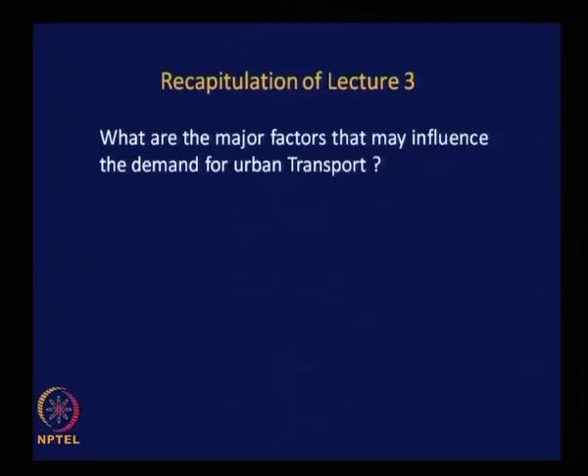Answer please. The population, household, age and the cultural aspects. Good. Any other factor? Yes, pass on the microphone there. The demographic and social factors. Yes. Any other response?

Economic factors. So to put all these things together, we can say that the factors can be categorized as demographic, social and economic factors, mainly involving population, household, age, cultural aspects, employment level, income and vehicle ownership, isn't it? So that is how we need to understand the various factors normally influencing the intensity of travel or demand for transportation in urban areas.

The next question is this: what is the likely proportion of urban population in the year 2030 as per United Nations population statistics in the whole of the world and in India, based on your own perception? Any response?

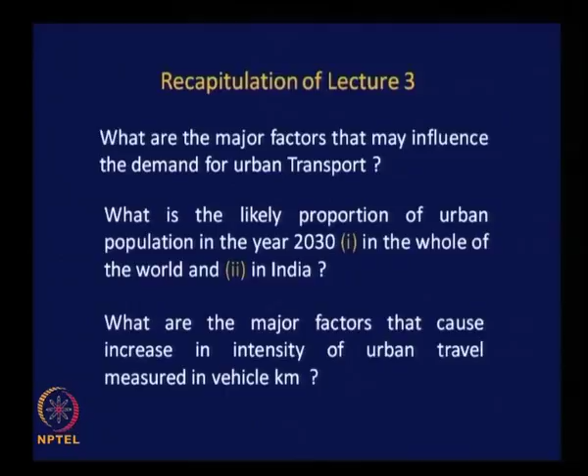You may recall that we discussed about the gradual increase in per capita trip rate in developed countries over a period of time, then increase in household vehicle ownership over a period of time, resulting in increased driving license holders. Then parallelly there was decrease in the household size due to economic independence of the people, and also there was decrease in car occupancy to satisfy the desire of independence, privacy, etc.

of the urban dwellers. Then on the land use side, there was migration of population, people living in city centers to the peripheral areas, mainly because of the suffocating congestion experienced in the city centers. And this migration led to migration of employment centers also to the peripheral areas, resulting in widespread urban transportation activity, leading to increased travel in terms of trip length or passenger kilometer.

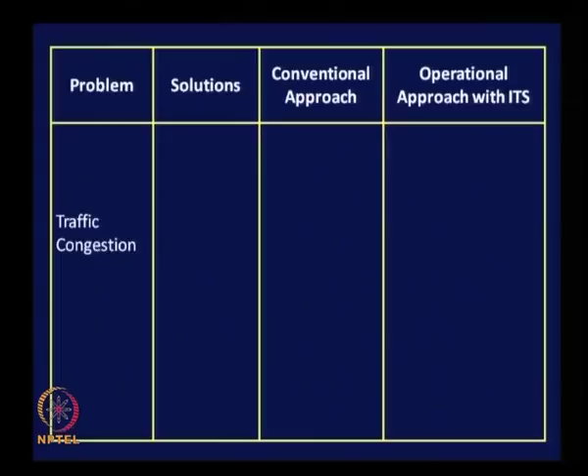And a possible solution in principle for this problem, as you may guess, is to increase roadway throughput or roadway capacity. A conventional approach to increase roadway capacity could be by construction of new roads or constructing additional traffic lanes.

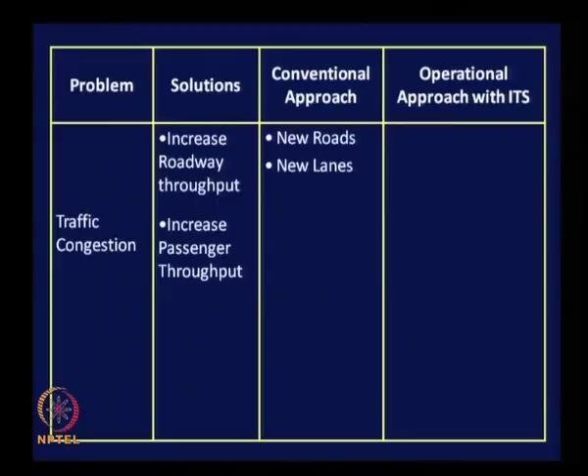Another possible solution to mitigate traffic congestion is to increase passenger throughput. The previous solution is to increase vehicular throughput by widening roads. Instead, you can think of increasing passenger throughput by some means.

It would be possible by means of the following measures: by providing HOV lanes, high occupancy vehicle lanes, exclusive lanes for high occupancy vehicles, so that these vehicles move faster, or encouraging carpooling. Once you provide HOV lanes, obviously you will find that carpooling picks up, mainly because more and more people want to occupy a single vehicle and take advantage of HOV lane, which facilitates faster movement.

Or you can also think of providing fixed route transit service, good transit service, metro rail system, good tram system, faster bus service, and so on.

Another possibility of reducing congestion is by reducing demand itself over space as well as time. You may wonder whether it is possible or desirable to reduce demand. It is not desirable, because we must encourage mobility in general, as mobility is key for growth of socio-economic activities. Our transportation planning process should not end up curbing mobility.

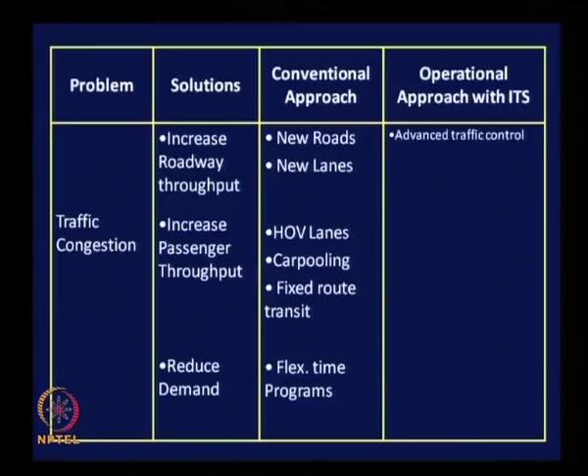You can also think of various ITS measures related to this conventional approach. I'll just quickly list these measures without going into details: advanced traffic control, incident management, corridor management, advanced vehicle systems, real time ride matching, integrating transit and feeder services, flexible route transit, and new personalized public transit.

Personalizing public transit is a very interesting concept - like a call-a-bus concept. People can record their demand for transport, and an operator can send a mini bus to pick up passengers based on the timing requirement as well as the destination requirement. That is what is meant by new personalized public transit.

Telecommuting, transport pricing - how do we reduce congestion by transport pricing? You can impose a toll in highly congested areas. Every vehicle has to pay a toll. This acts as a deterrent for vehicle users, resulting in reduced usage of highly congested areas. This is what we experience in practice.

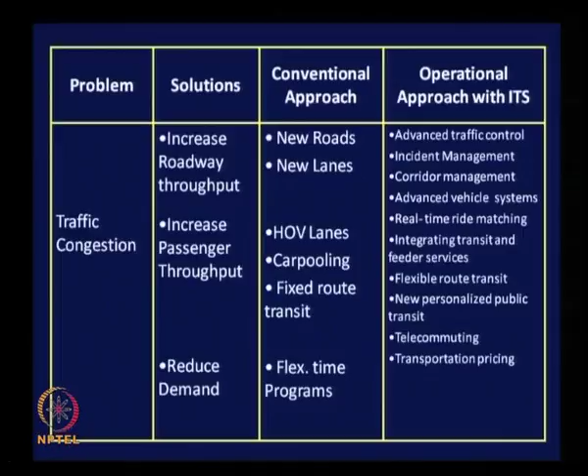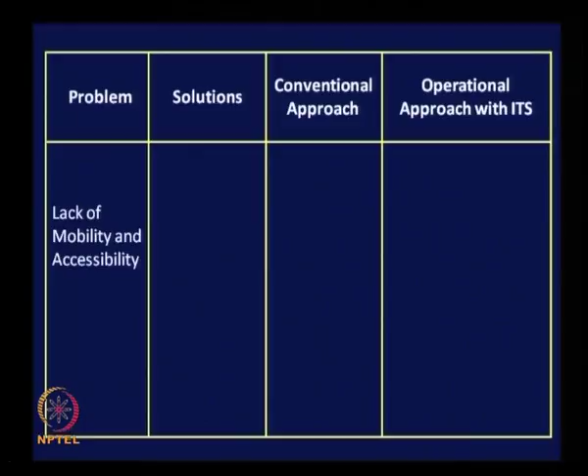Apart from traffic congestion, we have other problems common to any urban area. For example, lack of mobility and accessibility. We may have a system, but it might be difficult to access different modes of transportation, restraining the mobility of urban dwellers. The general approach to providing a solution is to provide user-friendly access to quality transportation service. This is a general methodological approach for providing a solution.

How do we do it? By conventional approach. The possible solution is to just expand fixed route transit and paratransit services - paratransit to provide access to the main transit service. That is how you can simultaneously increase both the availability of transit service and access to the available transit service.

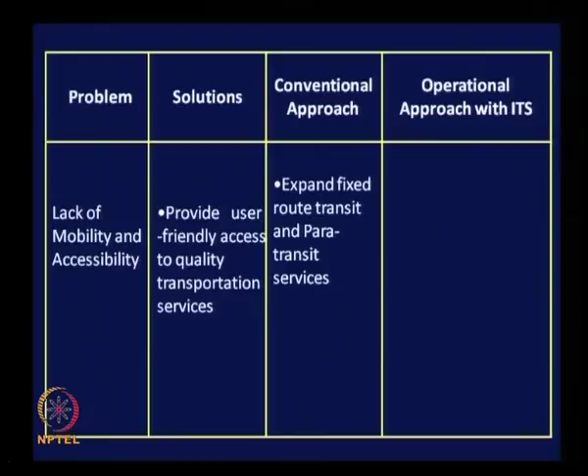Another related possibility of solving this problem is radio and TV traffic reports, which help commuters understand operational changes in the transit system and the level of congestion existing in different parts of the city. This will help them plan their trip or modify their trip timings so that they do not get caught in traffic problems.

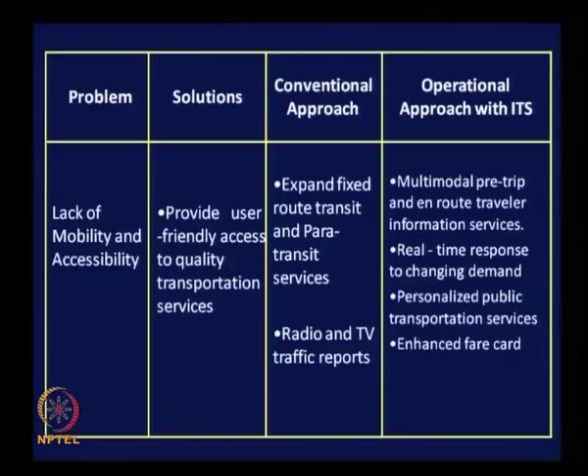The related ITS operational approaches are multimodal, pre-trip and en-route traveler information services, real time response to changing demand - as when you travel you get information about congestion levels in different parts of the road network - personalized public transportation services as mentioned before, and enhanced fare card, implying a single fare card can be used for multiple modes. This is quite common in developed countries, which makes travel seamless and convenient.

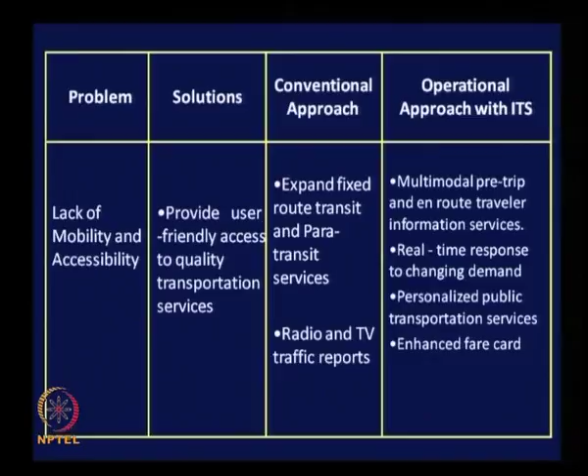Another common problem we face in urban travel is disconnected transportation modes. We have different modes of transport available in some cities, but they operate in isolation, maybe because of operational policies of different operators or for want of a coordinating system to integrate these modes and operate the whole set as one system.

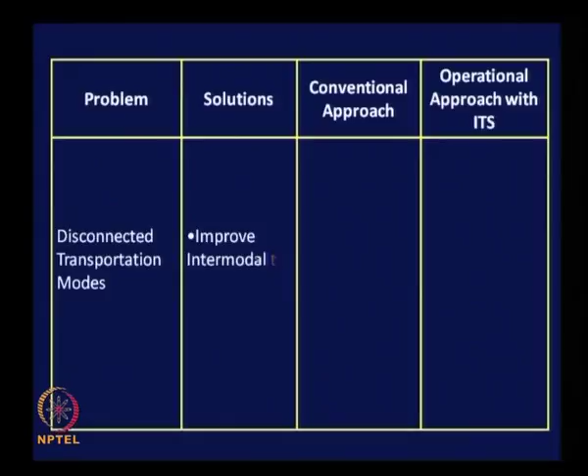The possible solution is to improve intermodality, or improve connectivity between existing modes. How do we do that in practice? By conventional approach, we have to physically construct intermodal connections - for example, providing good temporary parking facilities for buses at metro stations. Buses can bring passengers, drop them at metro stations, pick up passengers, and leave. Good parking facilities for two-wheelers, bicycles and so on connect the different modes of transport, making overall trip making easier for urban dwellers.

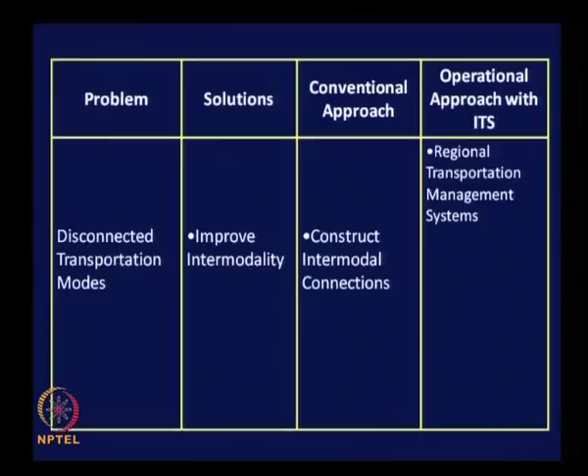Related ITS issues involve regional transportation management of the system as a whole. You can divide the urban area into different regions and ensure the whole region is well connected by the transportation system - taking a regional approach rather than looking at it at the micro level. That is what is meant by regional transportation management system.

Similarly, a regional transportation information clearing house answers any kind of question pertaining to a particular region for all users, providing a window for them to get this information immediately.

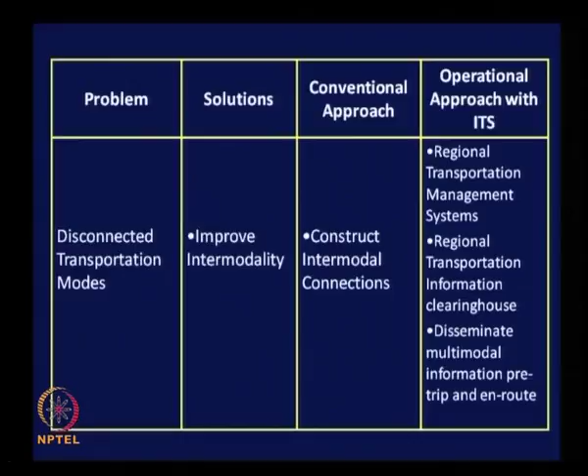Then disseminate multimodal information, pre-trip and en route, about connectivity between modes. Even while traveling, if they want information about the availability of a connecting mode, the traveler should be able to get it during travel. These are not imaginary steps - these are steps actually being taken in several cities of developed countries. These systems are in place and functioning.

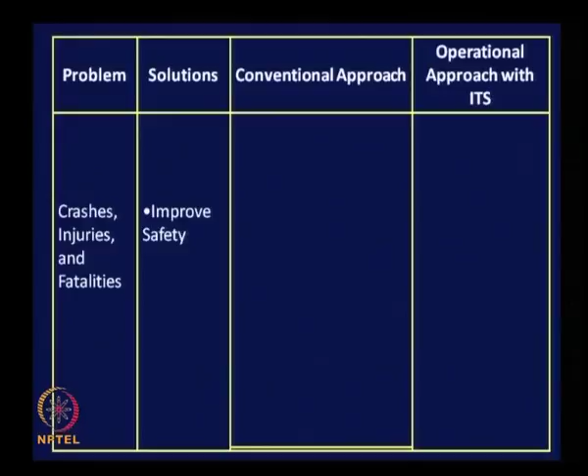And finally, the most severe and important problem faced in urban context is crashes, injuries and fatalities. What is the approach to provide a solution to this problem? Obviously, in one or two words: improve safety. How do we improve safety? The first major step could be to improve roadway geometry and sight distance.

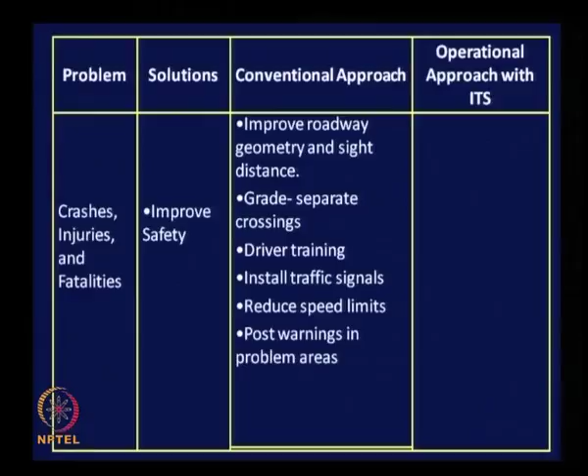Then grade separate crossings or construct flyovers at major intersections. Driver training. Install traffic signals wherever required. Reduce speed limits if required. Post warnings in problem areas, install warning signs or signals when required, and related ITS measures.

Partially and fully automated vehicle control systems - the vehicle should be automatically controlled in case of emergencies or crash-like situations. A vehicle condition monitoring system should be in place if you want a safe transportation system.

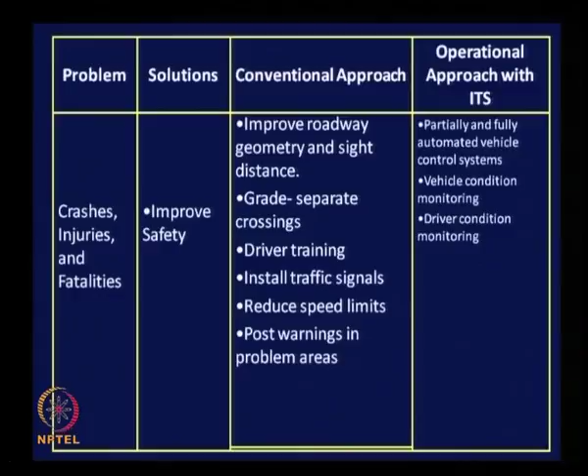Similarly, a driver condition monitoring system through proper driver licensing and continuous driver testing. Similarly, a good vehicle licensing system and continuous vehicle monitoring system. Advanced grade crossing systems, automated detection of adverse weather and road conditions, vehicle warning and road view notifications, and automated emergency notifications.

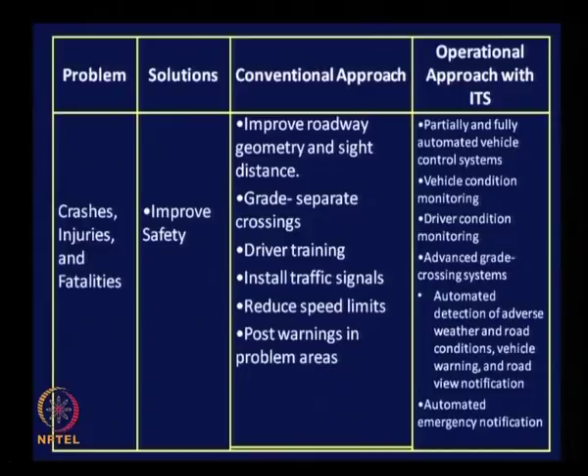We have discussed the common problems experienced in the use of transport systems in urban areas, starting from traffic congestion, disconnected modes, lack of mobility and accessibility, as well as traffic safety issues. As remedial measures, we discussed construction of new roads, addition of new traffic lanes, construction of intermodal facilities, improving roadway geometry, construction of flyovers, and so on.

My question now is, how do we go about constructing these infrastructural facilities which are highly capital intensive? How do you know that a new road you are going to construct will meet the demand for the next 1 year, 2 years, 5 years, or 10 years? Do you have the answer? Let us say you are planning to add one traffic lane on a particular road - are you sure it would be sufficient for the next 20 years? We do not know.

When you are constructing a flyover, what is the basis on which you will fix the geometry of width for different streams of traffic? When you consider a 4-legged intersection with two-way traffic movement on all 4 legs, you end up with 12 different traffic streams. And as a designer of this grade separation facility, you should clearly know the volume of each of these streams of traffic and the space requirement for them. Is it enough if you provide space for these streams as measured today, in the base year?

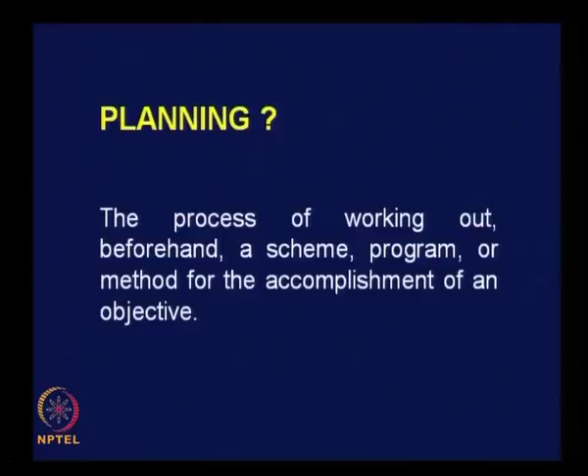With this understanding, let us try to define the process of urban transportation planning. Urban transportation planning is the process of understanding the factors influencing the demand for urban travel, then development of relationships between the factors and the travel demand, and third, use of the relationships to predict the future demand for travel and the resulting transport infrastructure needs.

That is the end point. Ultimately, we are interested to know what is the transport infrastructure requirement to meet the future demand. That is the end product of any transportation planning process. Clear?

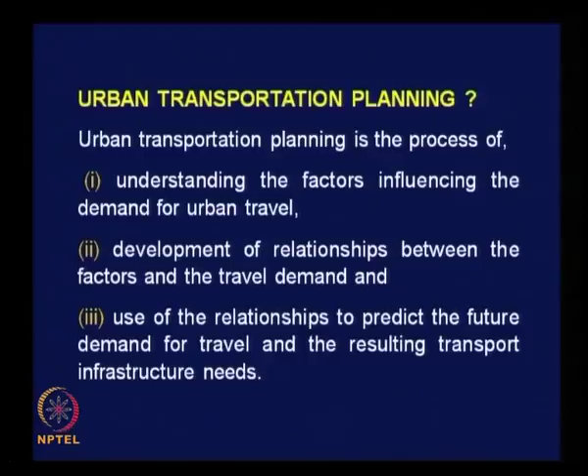Now we are ready to look at the contents of this course: Urban Transportation Planning contents. It starts with introduction, of which we have already completed for this course.

Then we will discuss the transport planning process in the context of urban transport system planning, mainly the various steps involved in the transportation planning process, and integration of goals, objectives and standards related to the urban community into the transportation planning process.

The third topic is trip generation analysis. As the term implies, it is about understanding the trip generation rate in urban areas. There are two aspects of trip generation: trip production and trip attraction. As you can guess, most of the trips are produced at home in an urban area, so we will be developing trip production relationships or models by relating the actual trip production with household characteristics.

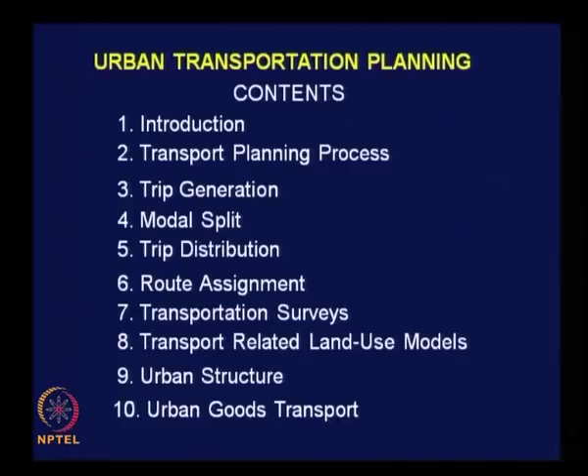Now let me give you some references for this course. I am listing the references in the alphabetical order of the author of the book. The first one by Adib Kanafani, 1983, Transportation Demand Analysis, publisher's name is given there, published from New York, and I will simultaneously give a feel of the book also to you. I will just show you the contents of the book so that you can understand the extent of utilization of each of these books to this particular course.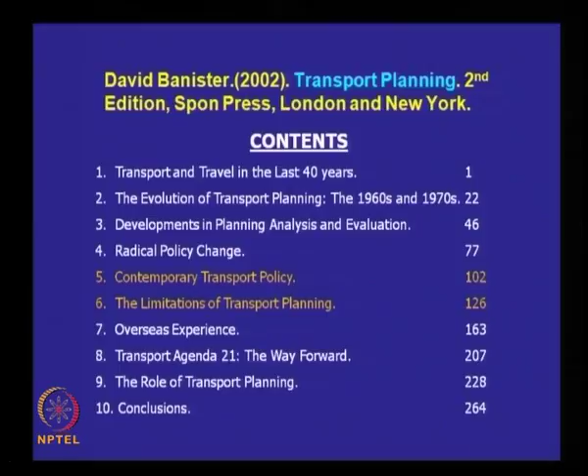Next, Hutchinson, B.G., 1974. It's a very old book. It was not revised subsequently, but it's a good book. Principles of Urban Transport System Planning.

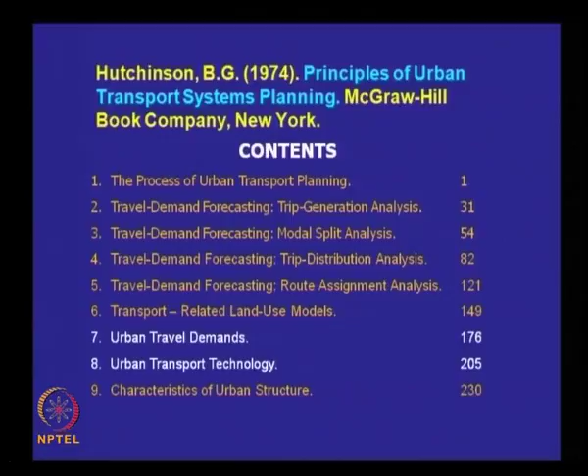And you can see the contents of this book, and I have given orange color to quite a good number of chapters of this book because I find it's quite relevant for this particular course, starting from the process of urban transport planning, trip generation, modal split, trip distribution analysis, route assignment analysis, transport related land use models, then urban travel demands, urban transport technology, characteristics of urban structure, and there are few more chapters in this book.

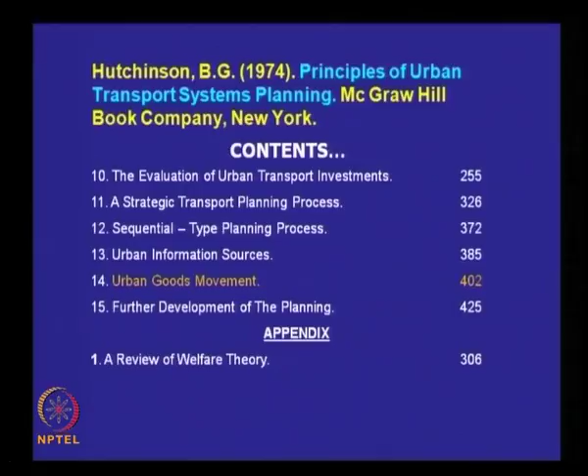The evaluation of urban transport investment may be relevant to transportation economics, a strategic transport planning process, sequential type planning process, urban information sources, urban goods movement is dealt with by this author, and further development of the planning process itself, and there is an appendix giving information about review of welfare theory, which is relevant for some of the modeling aspects related to transportation system planning.

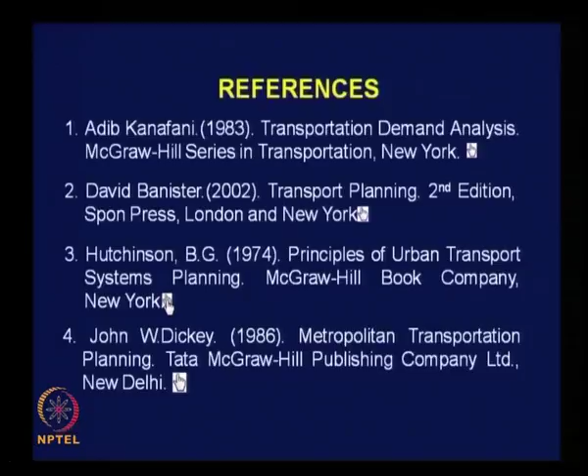Next, John W. Dickey, 1986. Title of the book is Metropolitan Transportation Planning, Tata McGraw-Hill Publishing Company, New Delhi.

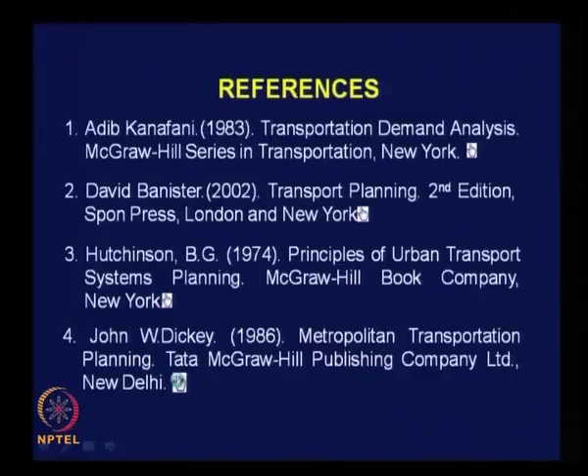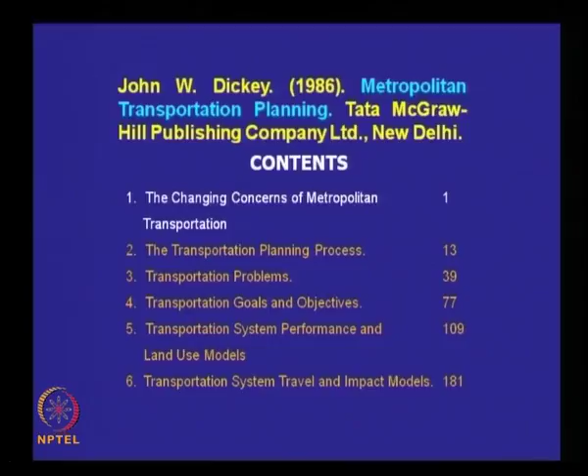Most of them are related to US transportation conditions, but still some of the basic aspects are relevant to our condition too.

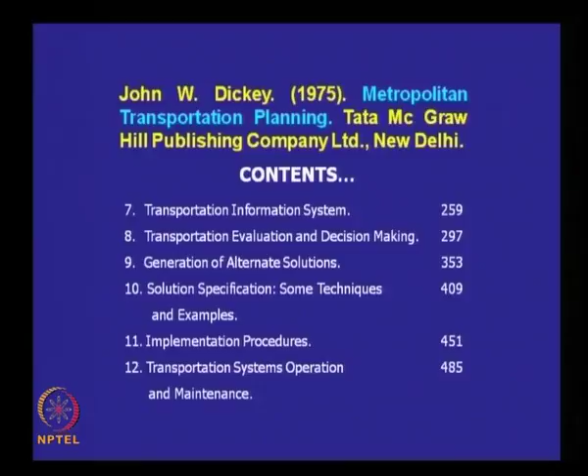A few more chapters in the same book: transportation information system, transportation evaluation and decision making, generation of alternate solutions, solution specification,

some techniques and examples, implementation procedures, transportation systems operation and maintenance. Then you can also refer to this book, Juan de Dios Ortúzar and Luis G. Willumsen, 1996, titled Modeling Transport.

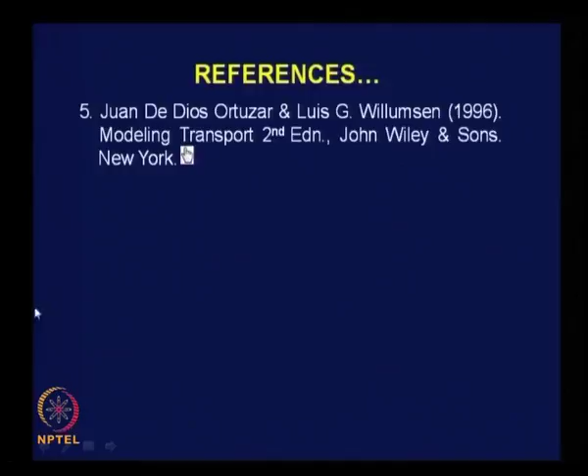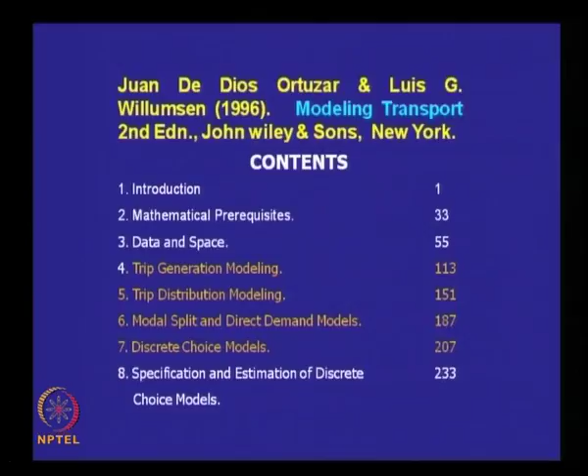Contents of this book: starting from introduction, mathematical prerequisites, data space, trip generation modeling, trip distribution modeling, modal split and direct demand models, discrete choice models, specification and estimation of discrete choice models, model aggregation and transferability, assignment, equilibrium between supply and demand, simplified transport demand models, and other important topics.

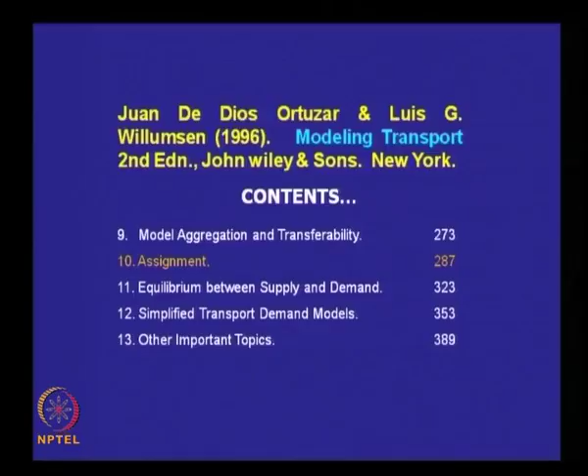As the title of this book implies, it mainly deals with analytical aspects related to the transportation planning process. Those who are interested in analytical aspects of transportation planning can refer to this book. This is a very useful recent book.

Then Kadiyali, an Indian author, Traffic Engineering and Transport Planning. Some of you might be familiar with this book, but please note that this book deals with almost 4 different areas: traffic engineering, traffic flow theory, transportation economics and transportation planning.

And he has given information under almost more than 50 topics in this book.

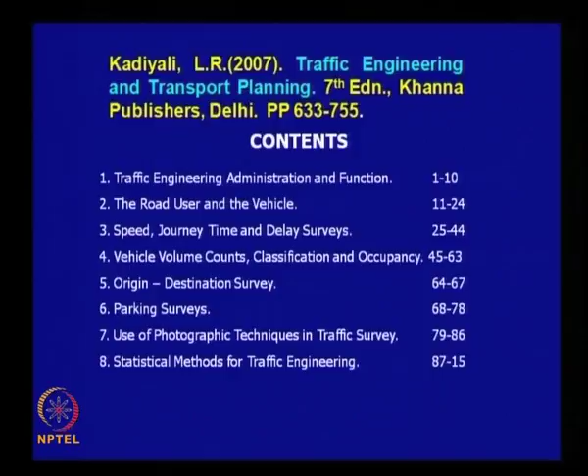I will just quickly go through these topics related to traffic engineering, starting from traffic engineering administration and function to statistical methods for traffic engineering, and then traffic engineering studies continue starting from speed studies, miscellaneous traffic control aids, street furniture and so on.

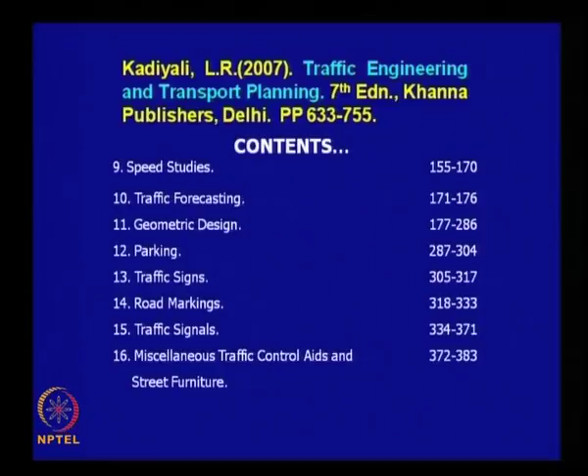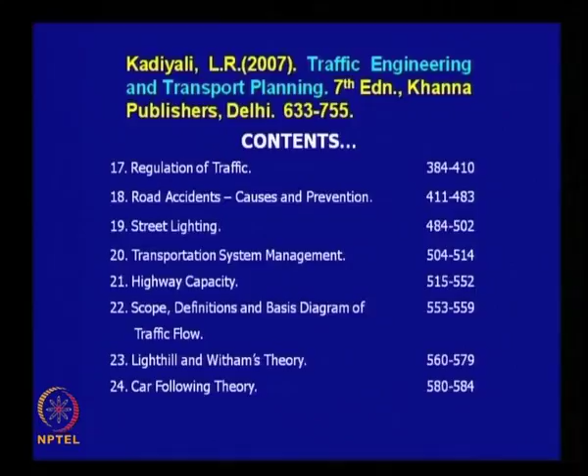It continues with regulation of traffic, transportation system management, scope definition, basic diagrams of traffic flow starting with traffic flow theory, Lighthill and Witham's theory, all related to traffic flow, car following theory and so on, queuing theory, vehicle arrivals, delayed traffic, simulation of traffic, all related to traffic flow theory.

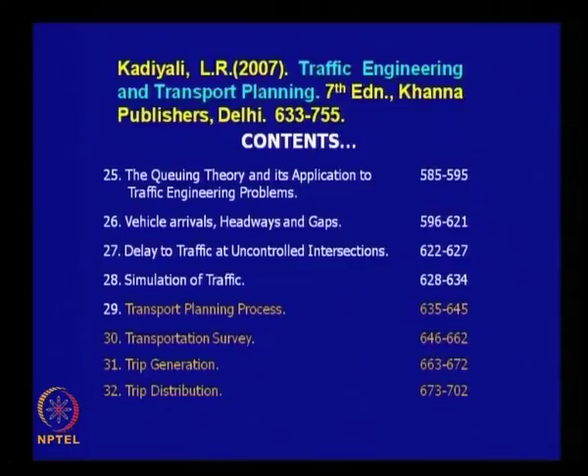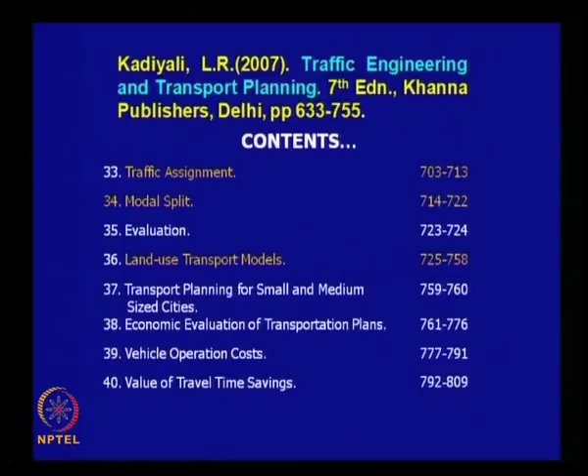Then starting from page 635 you have some information on transportation planning titled Transportation Planning Process, Transportation Survey, Trip Generation, Trip Distribution, Traffic Assignment, Modal Split, Evaluation, Land Use Transport Models and so on.

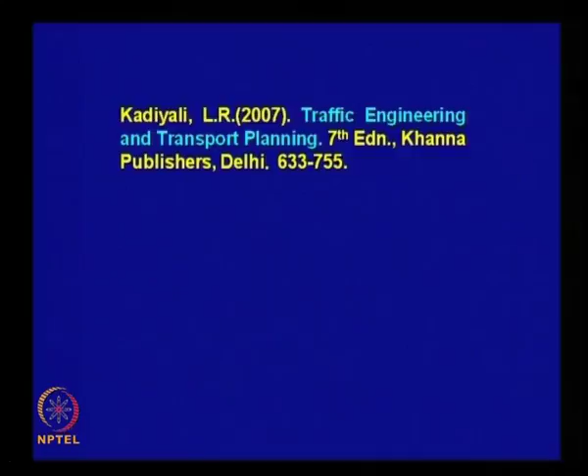And it continues, with other topics like accident costing, all related to transportation economics, and it goes up to 51 different topics in this book. Still, I would say under transportation planning you will find some useful information in this book too.

Then Michael D. Meyer and Eric J. Miller, 2001, titled Urban Transportation Planning, McGraw-Hill Book Company, New York.

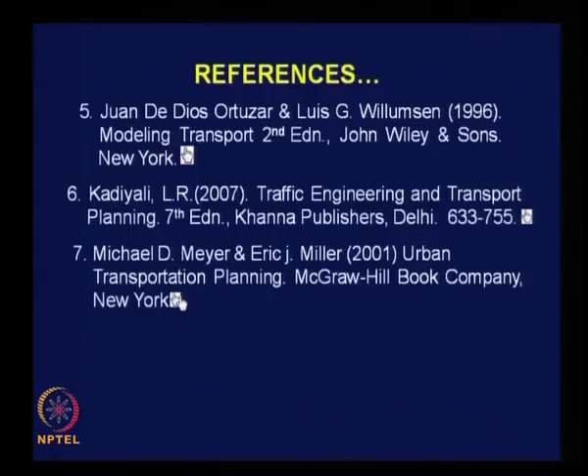Contents of this book I will just quickly go through. First 6 topics are relevant to this course, starting from urban transportation planning to urban activity system analysis.

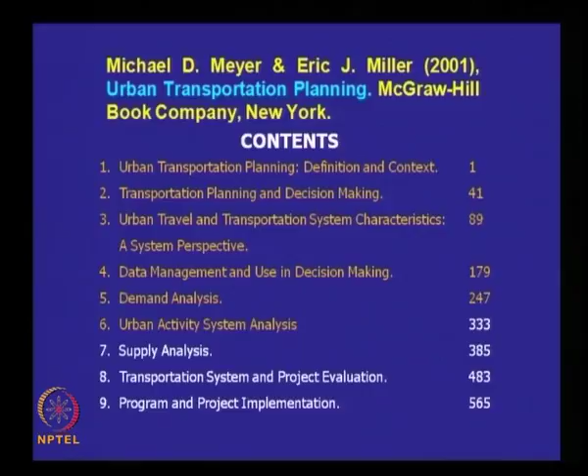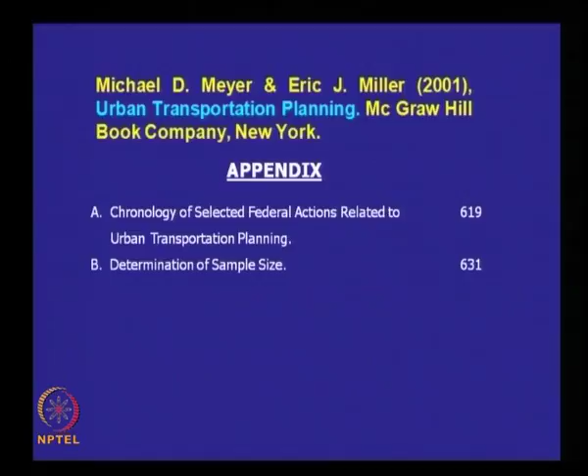The other topics like supply analysis, transportation system and project evaluation, program and project implementation, and a few more topics under appendix like chronology of selected federal actions related to urban transportation planning, determination of sample size. All these things might be interesting for research scholars and those who are interested in analytical aspects of transportation planning.

Then lastly, Papacostas CS and Prevedouros PD, 2004, titled Transportation Engineering and Planning, which deals with both engineering aspects as well as planning aspects. I will just show you the contents of this book.

It starts from introduction, roadway design, traffic stream flow models, capacity and level of service, transportation modes, urban and intelligent transportation systems.

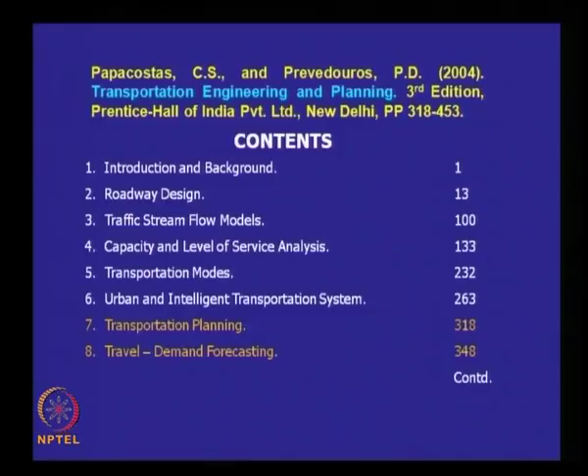Then he takes up topics related to transportation planning, travel demand forecasting, and then again topics related to traffic impact and parking studies, air quality, noise, evaluation and choice, elements of engineering economy, probability and statistics, queuing and simulation, transportation software, and so on.

And there is an appendix also. So these 8 references will be useful to you, and those who are interested to go further, there are a few more books available which you can find in the library and refer to.

To summarize, in this class we first recapitulated the important points of the previous lecture, then we discussed mainly the outline of this particular course, and we also defined the term planning and extended the definition to understand the transportation planning process. Now you are very clear about the contents of this course. It is going to be dealt with using 10 different topics, and you have now a set of 8 references for this course.

With this we will close our discussion for today. We will continue our lecture in the next class tomorrow.